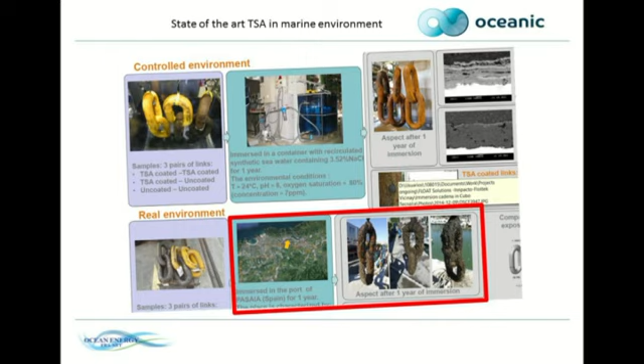So the idea of this project was to try to innovate in something that is quite old and has been used for many years. This comes actually from a previous project by others, from Spain. The company tried to protect metallic parts in the environment by using thermal spray aluminum. As you can see here, when you immerse thermal spray aluminum or metal in the ocean, there is something called biofouling.

Especially the problem here is the barnacles. When barnacles attack the aluminum foam of the thermal spray aluminum, which is a protection against corrosion, the aluminum will corrode very fast, so you will lose your 20 years of protection that you were aiming for.

So we thought there was maybe a possibility to mix anti-fouling properties inside this thermal spray aluminum. That's what Oceanic is about. It's not an anti-fouling solution for boats or stuff like that, it's more to regain the lifetime of the thermal spray aluminum layer by adding a protection against especially barnacles.

The project has a partner from Portugal, WavEC, and then we have people from Spain and Basque Country also, and then 3 partners from Sweden. We have been testing in Portugal, in BIMEP in Basque Country, and also together with WavEC we have been testing in EMEC.

Now I will show a 3 minute video, made about 1 year ago, just to give a brief introduction of what Oceanic is, and then I will go to the final results. I don't know if there is audio or not.

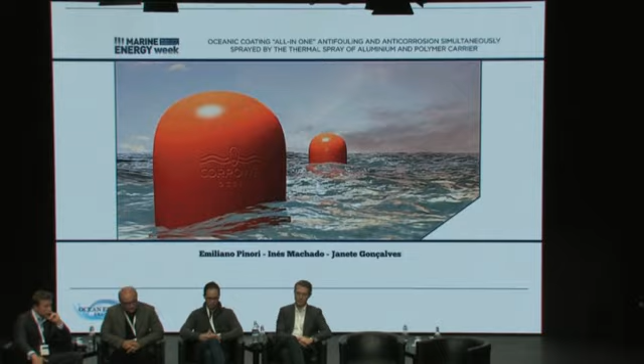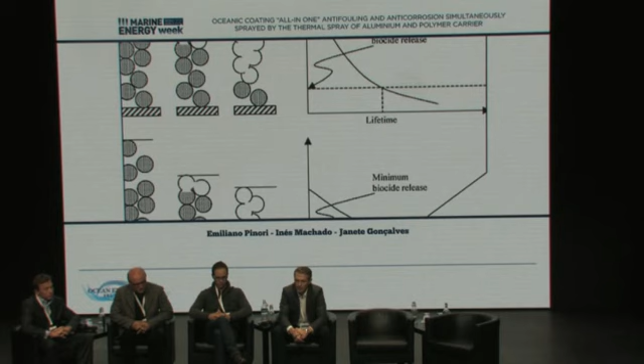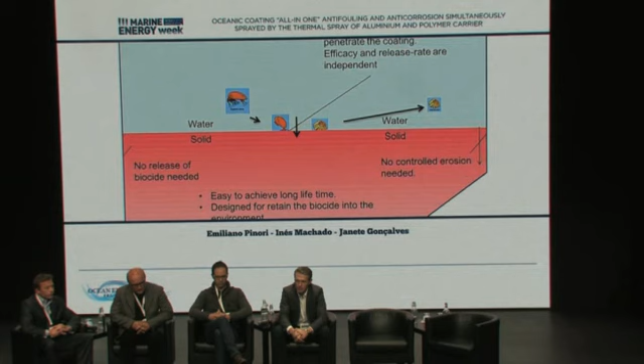Ocean energy devices and components are subject to one of the most aggressive environments. Corrosion, mechanical stress, but also biofouling and biocorrosion challenge the reliability of materials used. The ocean energy sector needs a surface protection system dealing with a very hard challenge. A novel technique has been demonstrated in the EU project LEAF. The new approach in anti-fouling has shown efficiency and has the potential to last for more than 25 years against barnacles, with trace emissions of organic biocide. More importantly, this approach is contact active and thus open for novel applications, even not paint-based.

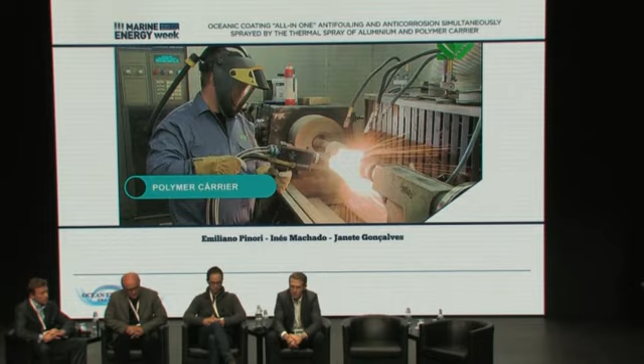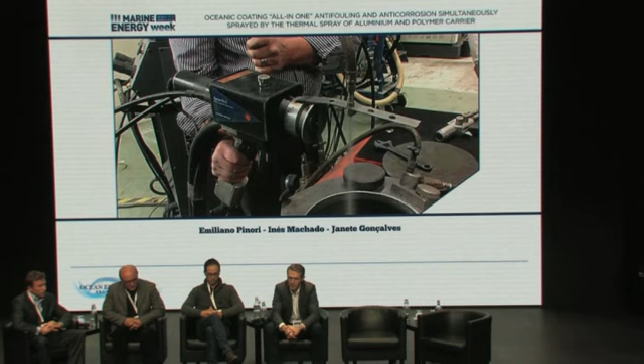The Oceanic project will embed this new anti-fouling technology into a polymer carrier, and mixing it with the well-established thermal spray aluminum technology will create a sprayed composite coating, achieving long-lasting protection against corrosion and biofouling in the marine environment. The modification of the TSA gun, with the addition of a feed system to add air-suspended polymer powder at a certain distance and angle with respect to the arc plasma nozzle, has been prepared.

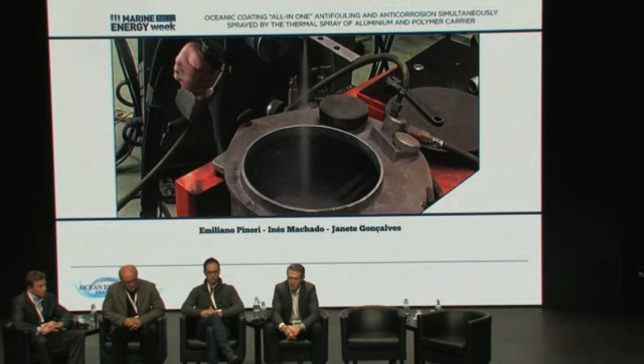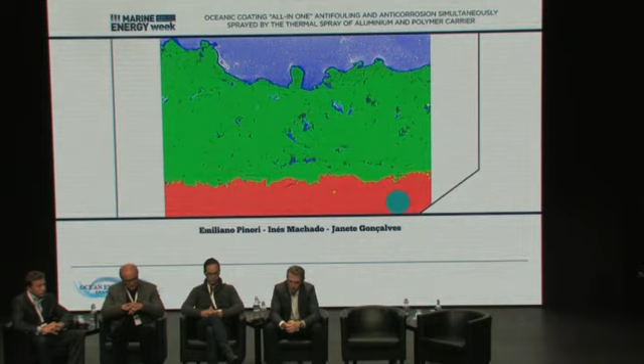The polymer used here is not yet the one doped with the biocide. This is under preparation, and several panels will be deployed at our 2 test bed sites, in Portugal and BIMEP in Spain, to check efficiency against corrosion and fouling during summer 2017. Oceanic gathers 8 partners from 3 different countries: Sweden, Spain and Portugal.

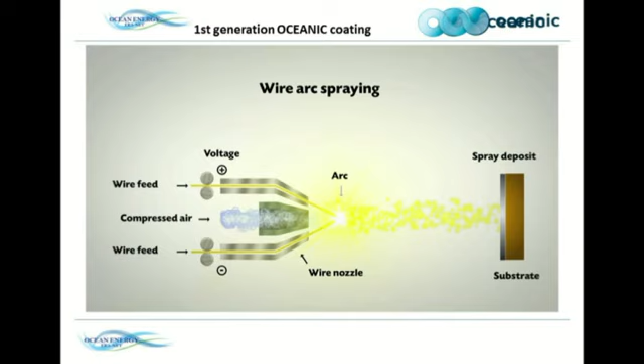So as you see, this video was 1 year ago. Now we have put the anti-fouling or anti-barnacle molecule inside the polymer and sprayed these panels. And as I said, beside Portugal and Spain, now we have also been testing in Scotland, in Orkney.

Just to remind you, the arc technique, the arc spray, is that you have a wire feed of aluminum or another alloy, with compressed air. The temperature is quite high there, but we have analyzed that the polymer and the substance are still alive once embedded in the aluminum foil.

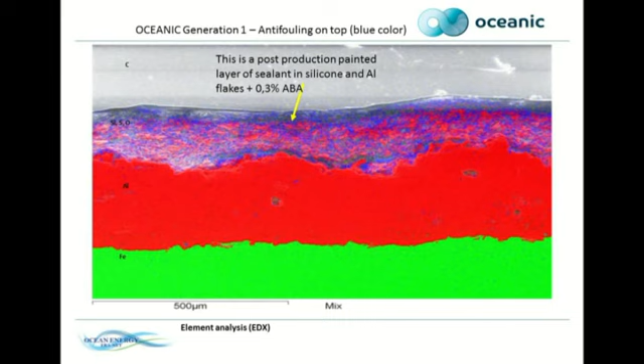At the beginning, we did it in a very easy way. As everyone knows, when you have the TSA layer, usually you put a sealant, a silicone base, and we put the abamectin there. This was the first generation.

We had very good results, but of course this means that when your layer is finished and deployed, you will never have this 20 years of protection against the barnacle. You maybe just postpone it by 1 year or 2. So we went for a modification of the gun, and tested and analyzed the results.

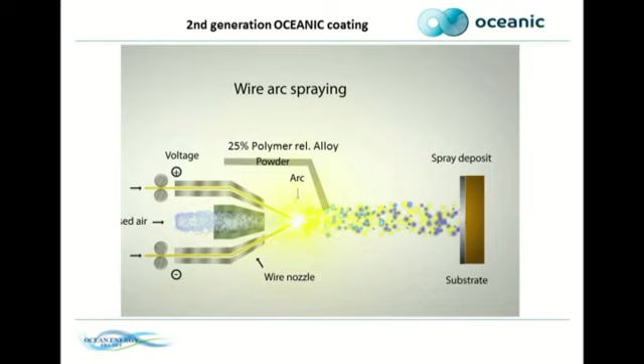So this is what we call our second generation. And as you've seen in the video, this picture, we could see that actually the polymer with this molecule called abamectin is inside there.

We tested here in Portugal, then we moved from offshore to near shore, in BIMEP and here in EMEC, together with Corpower.

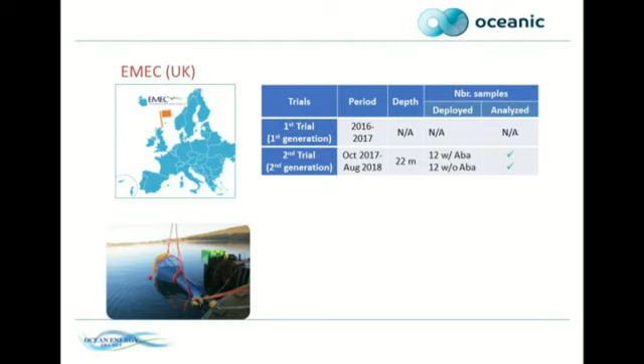So here you can see some results finally. These results arrived just 1 month ago, and we are still analyzing the results from Portugal and from Spain, and some of the panels are still underwater.

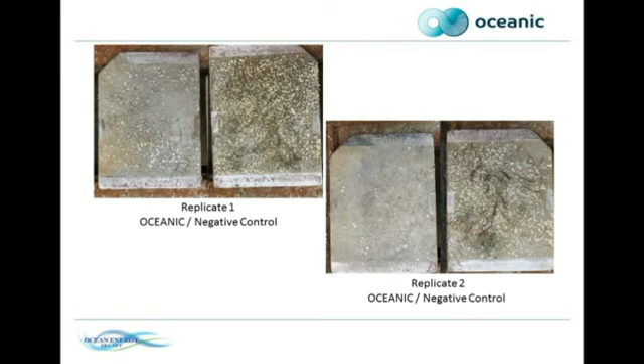As you can see here, on the left side you have the panel with the powder, with the polymer carrier with the abamectin. On the right side, you have the same setup, but inside the powder we don't have any abamectin. So it's the same material, the same structure, just the abamectin or this anti-barnacle molecule missing on the right side.

So you can see this is from EMEC, and you can see that there is a difference in how much the barnacle can grow on that.

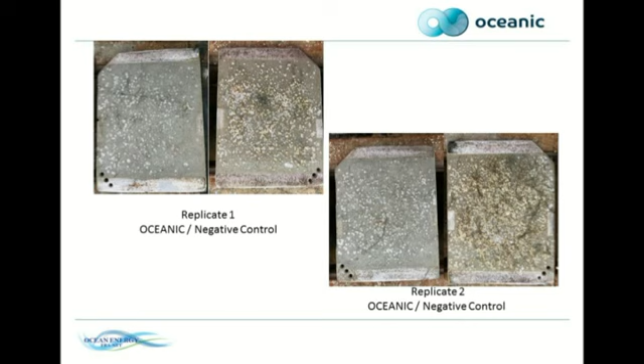There are several replicates - I'm not going into detail now, but we have different alloys and different kinds of polymer. It seems that all of them are giving significant results, at least preliminary. As I said, we will come out with final results at the end of the year.

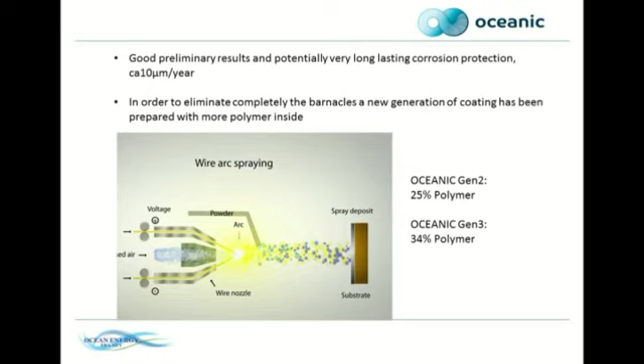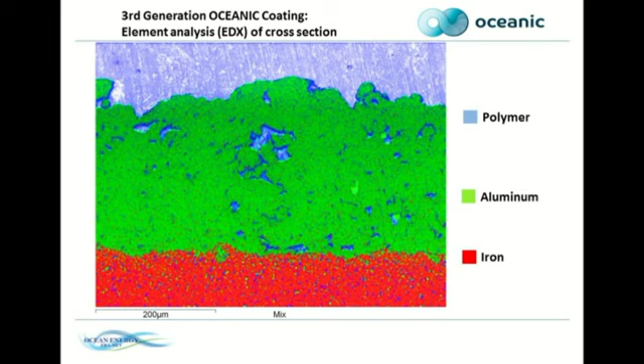Then what we needed was to try to improve this, because okay, it's better than the control, but it's still growing some barnacle. So what we did was move from generation 2, which has approximately 25% polymer when you spray it, and we modified it again, enhancing the amount of polymer from 25 to 34-35%. This is the analysis of this third generation of the polymer.

You can see there is a little bit more porosity, a little bit more polymer. We applied this, not this time on panels, but on what we call devices - it's shackle and eyebolt.

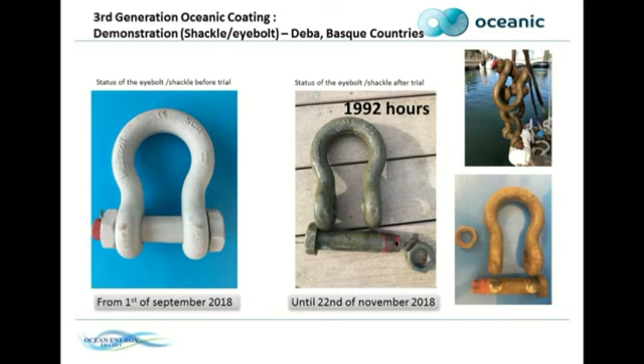And this was put inside the harbor in, I think it was Deba, so in Basque Country. This is not 1 year, but still usually here it grows a lot, even from September, so there are a lot of barnacles everywhere in this period.

And you can see that here, as much as we can see, there are no barnacles. There is some slime and other stuff, but we are most interested in barnacles because of their influence on the aluminum layer.

So we can see that we have tested and produced different alloys. We have tested them and worked on different polymers. So now we know a little bit more which polymers are working, which alloys work best. We have managed to do this all-in-one anti-corrosion, anti-barnacle solution.

Pedro will present another part of the project, which was to produce a database, not based only on our results, but on all the results, even from 30, 35 others. Pedro will tell you more, but it's a database that will be open to everyone to consult what's growing where.

And then, as I said, the final report will be on our website, so I hope we will be able to put that up sometime in December, before Christmas, if the weather and the waves permit us to do that. So thank you very much. If you have any questions.

I welcome Pedro Vinagre, Senior Researcher and Project Manager at WavEC, to explain the Oceanic project and the biofouling database.

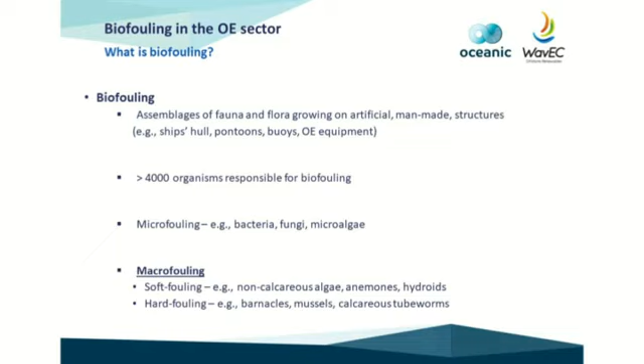There are over 4,000 organisms responsible for biofouling. It is divided into microfouling, including microorganisms such as bacteria, fungi, and microalgae, and macrofouling, which itself divides into soft fouling and hard fouling, which are the hard-shelled organisms.

Some examples of biofouling include different kinds of crustaceans, annelids, gastropods, and bivalves.

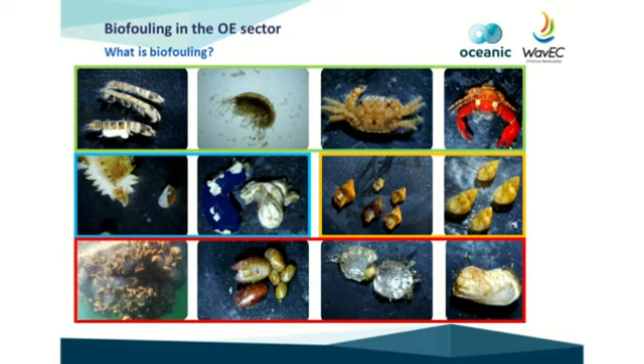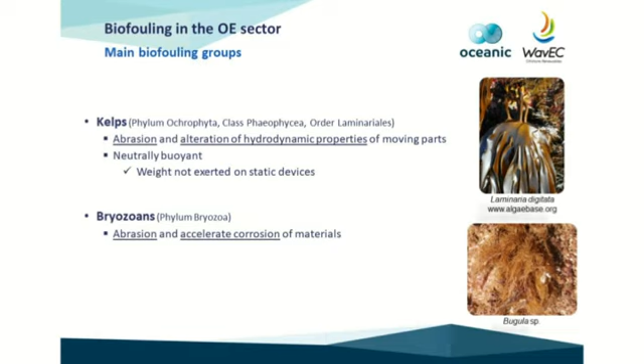In this database, we focus on 5 main biofouling groups because these are the most problematic within the ocean energy sector, namely the macroalgae, the kelps from order Laminariales. They cause great abrasion and alteration of hydrodynamic properties of devices, but since they are mostly neutrally buoyant, they mainly impact moving devices.

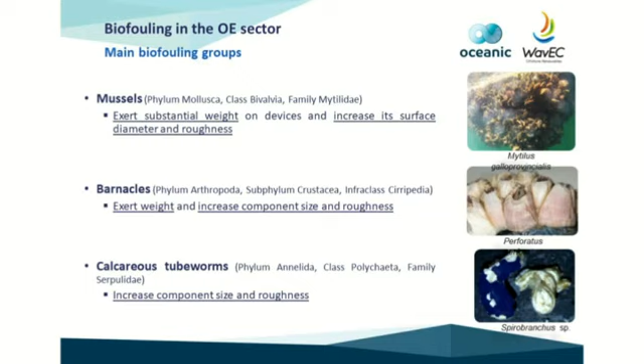Following that, the bryozoans, which also cause abrasion and accelerate the corrosion of materials. And some hard-shelled organisms such as mussels, barnacles, and calcareous tubeworms, which mainly exert substantial weight and increase the diameter of equipment and the roughness of that equipment.

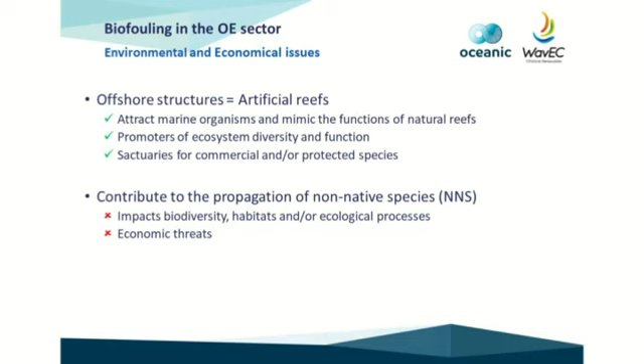The problem with biofouling is that offshore structures at sea mimic artificial reefs. This has positive aspects, meaning they will attract marine organisms and eventually promote ecosystem diversity and function, and may even be used as a sanctuary for endangered or commercial species.

However, because of this, they also contribute to the propagation of non-native species, which will eventually impact biodiversity and may also pose economic threats, for example, in aquaculture.

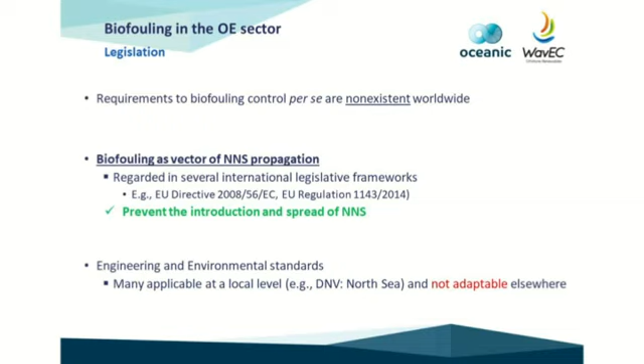There are no requirements per se directly related to biofouling. However, it is regarded in several pieces of legislation as a vector of non-native species propagation, and the aim of these legislations is to prevent the introduction and spread of non-native species.

There are also some engineering and environmental standards related to biofouling. However, they are many times applicable at local level and not adaptable to other regions.

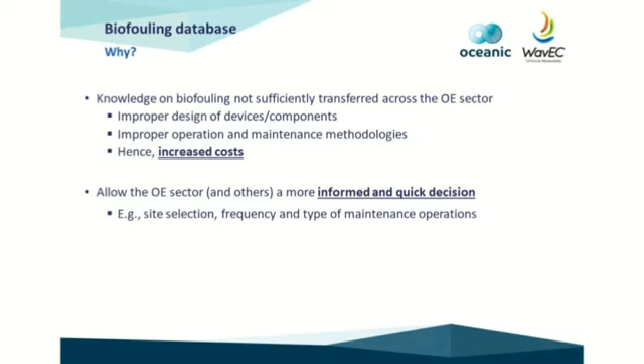So why develop such a database? We found that knowledge on biofouling is not being well or properly transferred across maritime sectors, and this many times leads to improper design of devices, operation and maintenance methodologies, and of course increased costs. Our database aims to allow the ocean energy sector and others to make more informed and quick decisions, for example, when selecting a site and the frequency and type of maintenance.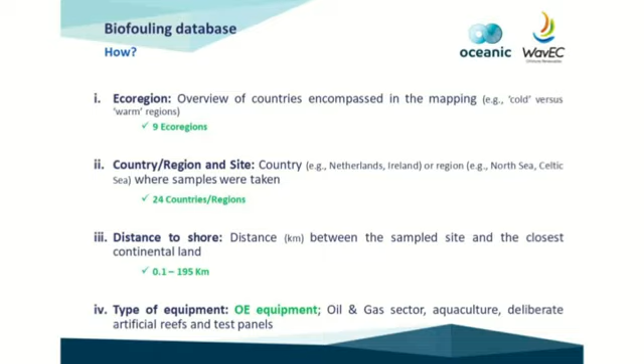How did we do it? We selected a few sections. This was developed for Europe at the moment. We searched for literature within biogeographic regions, so we have an overview of countries encompassed in the mapping.

At present, we included 9 ecoregions. Then within each ecoregion, we selected the countries. We have up to now 24 countries.

Following that, the distance to shore - this is the distance in kilometers between the sampled site and the closest continental land, which ranges from 0.1 to 195 kilometers.

The type of equipment - firstly we focused on ocean energy equipment, but due to the scarcity of data, we also searched for literature on the oil and gas sector, aquaculture, other artificial reefs, and also test panels.

We also included the period of immersion, which was the time in months or years during which the biofouling could grow - we found data ranging from 1 month to 39 years. And the depth at which data was retrieved, in this case from surface down to 90 meters depth.

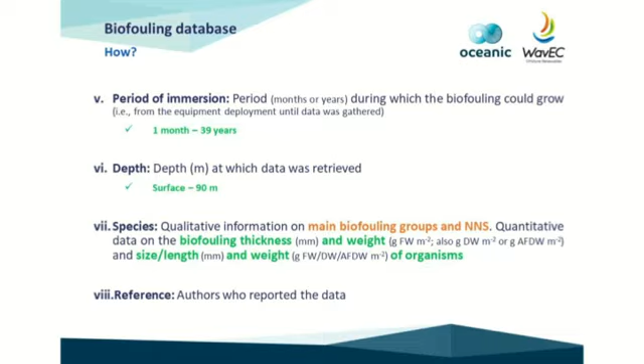Then we added the species qualitative and quantitative information, mainly the biofouling thickness and weight of samples, and the size, length and weight of the hard-fouling organisms. And finally, of course, we reference the authors that reported that data.

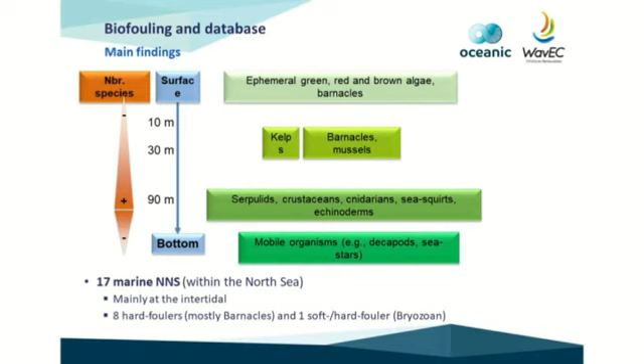The main findings were that the number of species would increase down to 90 meters depth and decrease largely towards the bottom. Depending on cold versus temperate, warmer waters, you would have a first band of green filamentous algae, followed by kelps and accompanied by barnacles and mussels up to 30 meters, and then very different kinds of mobile organisms down to the bottom.

Interestingly, we found in this data 17 marine non-native species already reported within the North Sea. They were found mainly at intertidal zones, and mainly they were barnacles.

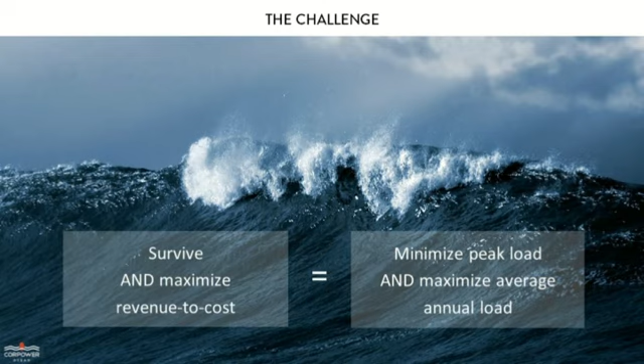If you look at the technical challenge behind that, the challenging part is that you often have very high peak loads, which drive the sizing, the dimensioning, and thereby the cost of the devices, whereas the average loading is on a lower level. If you have too large differences between peak loading and average loading, it's hard to make a business case.

That key challenge is what we are addressing and changing with the technology we're introducing by Corpower. To do that, we're introducing a few innovations to wave energy. Our buoy is a point absorber, a pre-tensioned composite buoy moored to the seabed. You see the cable coming out at the bottom.

If we look inside the composite buoy, we have a few innovations that make wave energy more effective. The first is a pre-tensioning technology. Instead of loading the buoy with a lot of mass, we pull it down to the midpoint by an air pre-tensioning system. The effect is that the natural frequency the device wants to oscillate with in its natural state is much faster than any incoming wave of an ocean spectrum.

This means it's a very poor absorber of energy - it doesn't respond to the ocean waves. This is the detuned, protected state that we use in our device during storms. When we put it back into the natural state, it's very transparent to incoming waves.

What we then add is a new invention called the wave spring, which is a negative spring that changes the stiffness of the system. Doing that makes us resonant with all incoming waves of a typical spectrum. So it's an on and off control.

On the buoy here, moving in the tank, you see how the buoy actually makes a motion which is 2 to 3 times higher than the incoming wave itself. This is due to phase control, and the resonance effect amplifies the motion 2 to 3 times, and 5 to 10 times higher velocity.

After this, we add a new solution we call a cascade gearbox, which we use to translate this amplified linear motion into rotation with a very robust and high efficiency type of gearbox that has a high degree of damping. These three innovations together bring new solutions to wave energy that make it possible to become much more competitive compared to the past.

This is the PTO as it looked in our stage 3 equipment. If you look at some of the metrics we've been able to show so far - energy per force or energy per volume, basically how much you can extract from a given buoy volume - we've been able to show 3 times as much energy compared to the prior state of the art.

And if you look at energy per ton in structural efficiency, which was mentioned in previous talks today as well, we've been able to increase it 5 times compared to the previous state of the art. With these solutions, we bring wave energy to a similar structural efficiency as the most competitive offshore wind turbines of today.

So it's a major jump for the sector. And to prove this, we've been going stepwise.

We followed a structured verification approach where we started small-scale tank testing here in Portugal in 2012 and 2013. We got very good results, which motivated investment into the next stage of testing that we did in France in 2015-2016, where we built our first PTO test rig, which we ran in Sweden between 2014 and 2016.

And now recently we've just completed our stage 3 demonstration that we've been running in Orkney. It's been a 3-year project overall for the design, fabrication, and dry and ocean testing, and I wanted to give you an update on the results we've shown there.

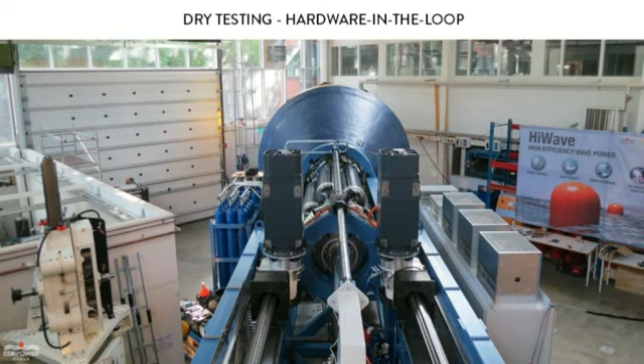We can say that the first phase of the project, we've been going through an extensive dry testing phase. This part was funded by Wave Energy Scotland and the program David mentioned before, together with the Swedish Energy Agency and InnoEnergy, and we started putting the devices together.

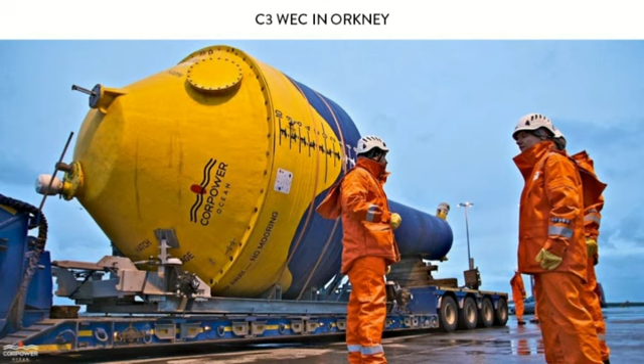With a simulated wave environment in a hardware-in-the-loop test rig, we could start with low energy waves, low motion, and begin debugging and stabilizing the equipment. We corrected around 100 different small issues with the equipment until we could have it fully stabilized and achieve the uptime and availability, and by the end of the dry testing period, we took it through full range storm loading that we could simulate in the dry test rig.

After that, by September of last year, we shipped the equipment to Orkney. This is what our half-scale device looks like when it arrived in Orkney. It's a 4.2 meter buoy, 15 tons.

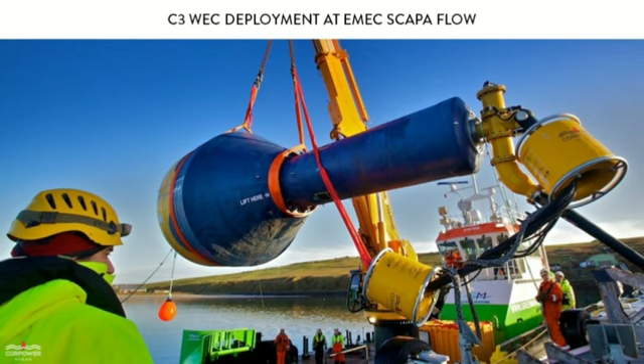We then installed it at the SCAPA Flow test site, which is a nursery site of EMEC. We had the opportunity in the ocean test program to go through 3 rounds of installation and retrieval while optimizing all the auxiliary components around it. So today we've gotten down to around a 1 hour cycle time for connecting the device after positioning the vessel and arriving at site.

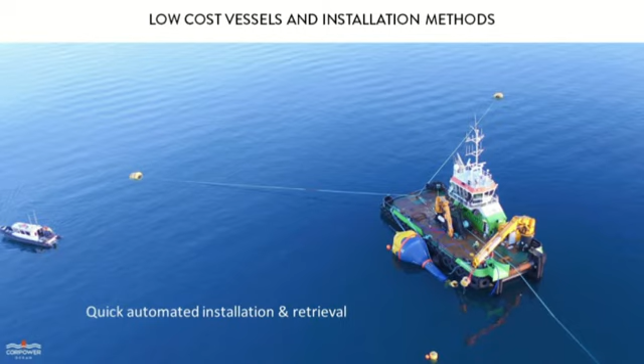So we've been developing very effective and low-cost operations and maintenance methods here using multicats with day rates in the few thousands of pounds per day.

And with the installation in Orkney, we've been connected to a microgrid, a floating microgrid located on this test and support buoy, and we've had data transfer and communication through radio link to shore.

When we did the testing in the dry rig in Sweden, we were grid connected, so in that sense we've proven the grid quality during dry testing. And here we've proven the market application for off-grid, islands and other offshore installations with the installation in Orkney.

Since the installation, we've been going through a range of fairly large storms. We have seen winds up to 50 knots, and we've had waves up to 4 meters, with individual waves on this half-scale device equivalent to 8-meter waves in the full-scale equipment.

Here you can see the device operating in this detuned storm protection mode, and you see how the device is essentially standing still while large waves just pass by it. The device becomes transparent to incoming wave energy, and you can compare this function to a wind turbine pitching down its blades in high storms.

Essentially, every commercial wind turbine on the market today has that capability of pitching down the blades to avoid overrunning in storms, and we're adding that same functionality to wave energy with our technology. That has been proven to work extremely well, and the loads we've measured in storms are actually not higher than the loads we're measuring in the moorings during regular operational sea states.

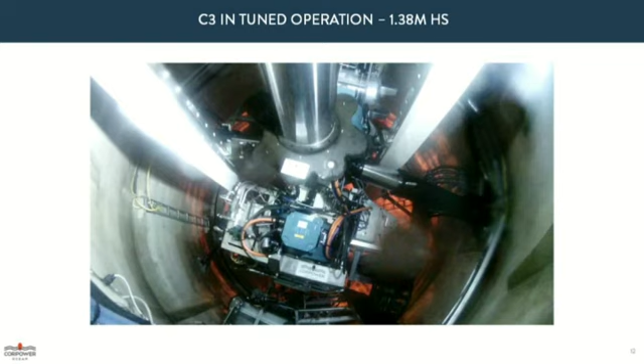If we look inside the device when we ran it tuned, you see a large motion, and we've been able to verify the energy production in all the relevant sea states you could experience at the SCAPA Flow test site. Very encouragingly, we've actually proven that this transparent protection mode has worked really well.

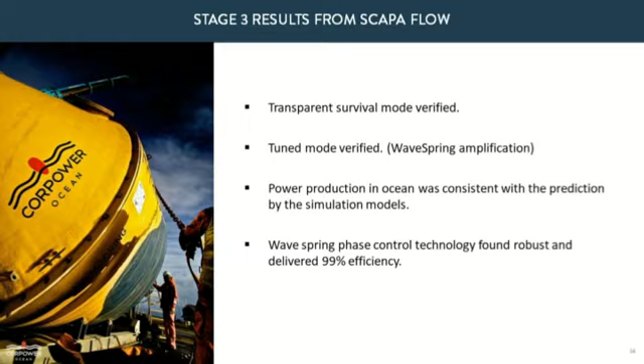We've shown survivability throughout all the weather experienced, and the power production in all sea states measured has been slightly higher than predicted by the simulation models. That has been one of the most encouraging outcomes of the testing - a combination of survivability and effective power production. This new wave spring technology has been proven to have very high efficiency.

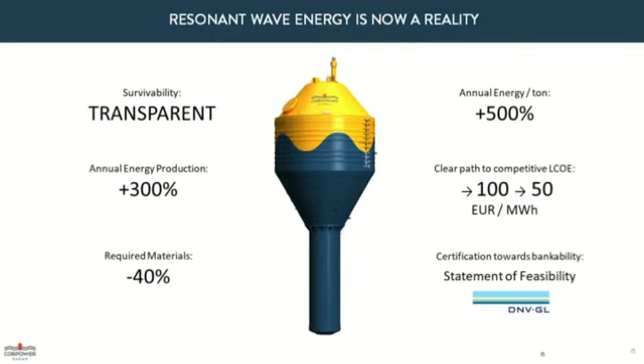So to summarize, we can now confidently say that resonant wave energy is a reality, and the transparent protection mode is probably the most important feature that we bring to make wave energy reliable.

We've proven an annual production increase of 300% for the same size buoy when using the wave spring control technology. Looking at structural efficiency, how much energy we get per ton, we are above 10 megawatt hours per ton on the very first full-scale prototypes.

If we compare that to some of the wind float numbers mentioned before, around 300 tons per megawatt, this corresponds to about 200 tons per megawatt in our very first generation full-scale equipment. So we think we're taking wave energy a major step forward here.

Getting a lot of energy from a fairly low-cost small device gives low capex per megawatt. Small lightweight equipment is also cheaper and easier to handle with low-cost vessels, which drives down operations and maintenance costs. Altogether that contributes to a clear path to 100, and to 50, euros per megawatt hour as volumes increase.

In stage 3, we've been going through a certification program together with DNVGL, where we've achieved a statement of feasibility. In the next phase, we're now looking to have a full prototype certification on the equipment.

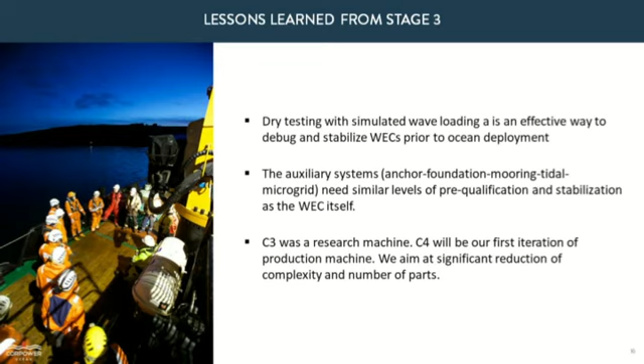We've also done a lot of learning through the testing over the last 18 months. One of the big conclusions is that dry testing is essential - there are so many small things you could and should find in controlled environments on land before you put anything in the ocean. So at full scale, we will continue to invest in dry test equipment that can provide full range loading up to storms.

We've also concluded that with all the wet systems around it, most of the downtime we had in Orkney was actually due to auxiliary systems such as the anchors, the tidal regulation, and the microgrid. So it's just as important to pre-qualify those auxiliary systems.

Having done the dry testing, we achieved very good availability of the wave energy converter itself. In our next programs, we will have a larger program pre-qualifying the wet kit, if you like.

C3 was our first equipment that we put in the ocean. It was a research machine to prove the performance and survivability in storm protection mode. Next time, we're aiming for a significant reduction in complexity, doing the same functions with fewer parts and driving down the cost with that.

Our vision for 2023 is to have a fully bankable product proven through ocean testing with at least 3 devices operating in an array. We are going to clock at least 8,000 hours of operational data on these so that we can get it certified for availability and yield.

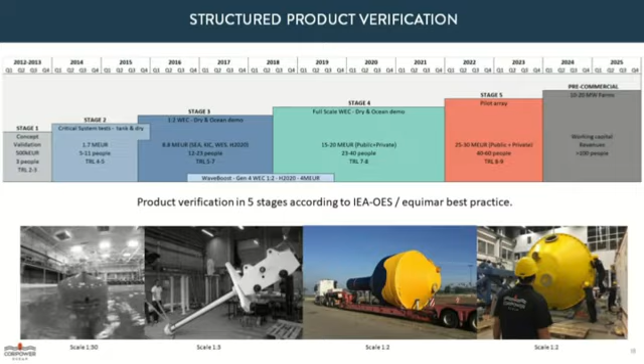We plan to do this in 2 more stages: what we call stage 4, a single full-scale device, which we are currently in the design phase of, with construction scheduled to start after next summer. Then another array phase adding 3 more devices to this installation.

A big part of the program is already funded. We're still in discussions with multiple places for where to go - Portugal is one option where we might end up with this demonstration.

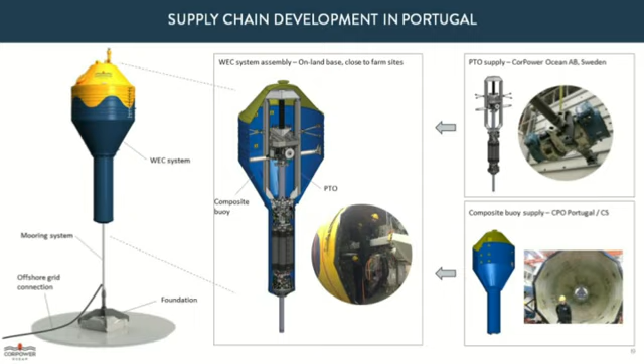If we end up here in Portugal, we intend to build out a significant supply chain - essentially everything around the system: the composite buoy, the foundations, the moorings, the electrical infrastructure, and of course the operations and maintenance installation work will be developed here in Portugal.

In Sweden, we will do the drivetrain, the PTO itself, which sits on the inside of the equipment. So we're looking at setting up an operations and maintenance base in the north of Portugal.

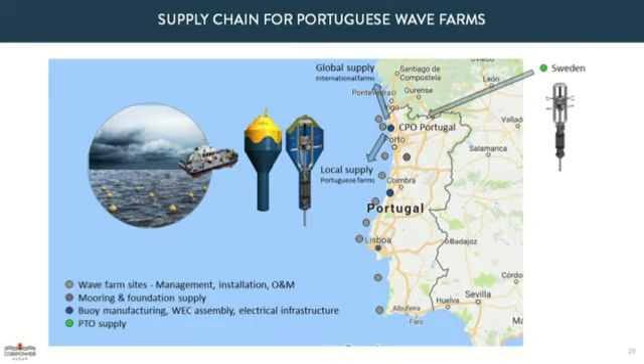If we go here, we will be using the Aguçadoura test site together with EDP. We found very attractive facilities where we could build out both for the final assembly between the composite buoys and the drivetrains, and for operations and maintenance. So we're very excited about the opportunities of taking wave energy to a fully proven commercial solution here.

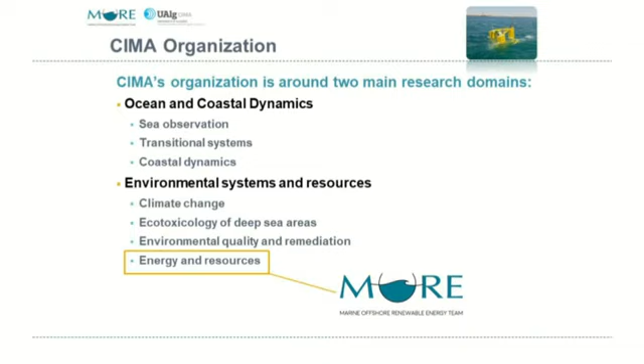Its organization is around two main research domains, which are ocean coastal dynamics and environmental systems and resources. Each of them has its sub-research topics. It's in the second one where the MORE team is inserted.

At the moment we are four researchers with different areas of expertise. Claudia Siqueira is a professor at the University of Algarve. She's a mechanical engineer specialized in vibrations, maintenance, and condition monitoring systems applied on wind turbines.

Theo Moura is a postdoctoral fellow under the project Monitor. He is an oceanographer, and his expertise is in long-period waves and data acquisition.

Myself, I'm a Marie Curie fellow under Project Optica. My background is in coastal engineering, and my expertise is in numerical modeling and mathematical optimization.

Finally, André Pacheco is the former vice director of CIMA, and he is the MORE team coordinator. He is an oceanographer, and his expertise is in coastal process and data acquisition.

Related to our projects, right now we are involved in five marine renewable energy projects, all of them related to UK institutions.

Project SCORE, Sustainability of Using Ria Formosa Currents on Renewable Energy Production, is funded by the Portuguese Foundation of Science and Technology. Its main objectives are to collect data from the operation of a small floating device, to validate models that will allow assessing the environmental impact of energy extraction, and also to develop cost-benefit analysis of tidal energy balancing supply and demand.

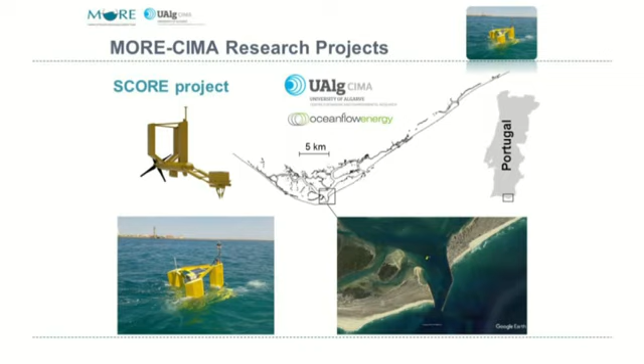For those who don't know, Ria Formosa is a coastal lagoon based in the region of Algarve in southern Portugal. It's a multi-inlet system where the Faro-Olhão inlet has pretty strong currents, and is where we deploy our small device.

Project Optica, Optimization of Tidal Energy Converter Arrays, is my Marie Curie project. The main objective is to formulate and solve mathematical optimization models based on numerical simulations to minimize the levelized cost of energy while decreasing detrimental environmental impacts.

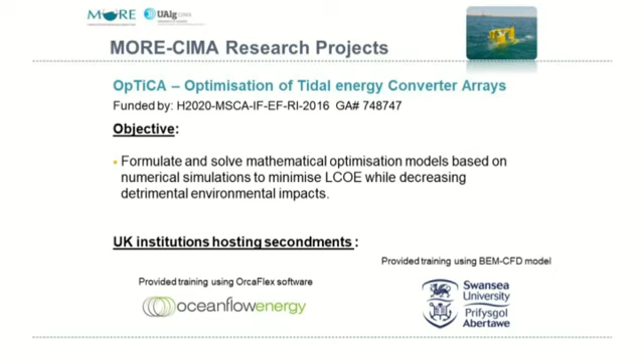The project considers two secondments, both in UK institutions. The first one was with Ocean Flow Energy, where I gained skills using the OrcaFlex software.

The second secondment was with the Marine Energy Research Group of Swansea University, where I got skills using a blade element momentum CFD model based in OpenFOAM. Here are a couple of results applying the BEM CFD model with some horizontal axis tidal turbines.

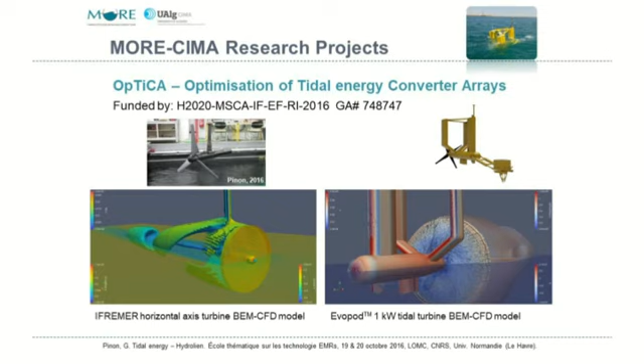Project Monitor, Multi-Model Investigation of Tidal Energy Converter Reliability, is funded by the Interreg Atlantic Area. Its main objective is to investigate the reliability of tidal energy converters and develop tools to increase it.

The project consortium is made of several institutions from Europe, including three from the UK: Swansea University, which is the project leader, EMEC, and Catapult Offshore Renewable Energy.

The other institutions are the University College of Cork, the region of Normandy, University of Le Havre, and also two tidal energy developers, one from France, which is Sabella, and the other from Spain, which is Magallanes Renovables.

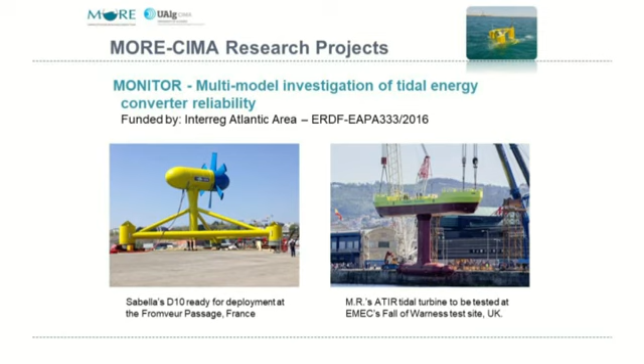On your left you can see the Sabella D10, which is a bottom-fixed tidal turbine, and on your right is the ATIR floating platform from Magallanes Renovables.

FLOWSPA, Floating Offshore Wind Support Platform Assembly, is funded by the H2020 SME Instrument. Its objective is to demonstrate the feasibility of a floating offshore wind foundation structure, the StarFloat. The project leader is Ocean Flow Energy.

We are helping Ocean Flow Energy with the proposal writing, numerical modeling, prototype construction, and the setup of preliminary stability tests. Here you can see some pictures of the small prototype that was tested at the Royal Quays Marina in Newcastle.

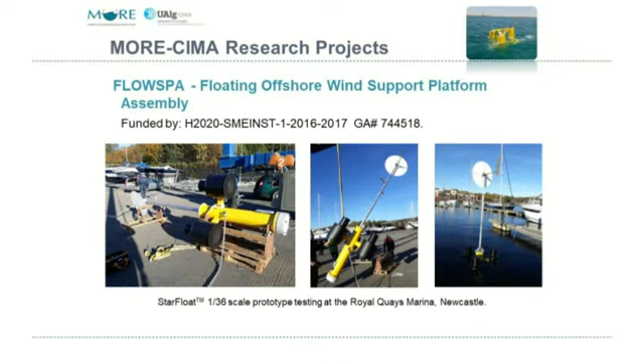Finally, PAMS, Performance Analysis of a Multifloat Spar for Supporting Wind Turbines, is a continuation of the FLOWSPA project. It's also led by Ocean Flow Energy. Its objective is to test the device in a wave tank with different wave conditions and wind conditions. We will help Ocean Flow with the data processing.

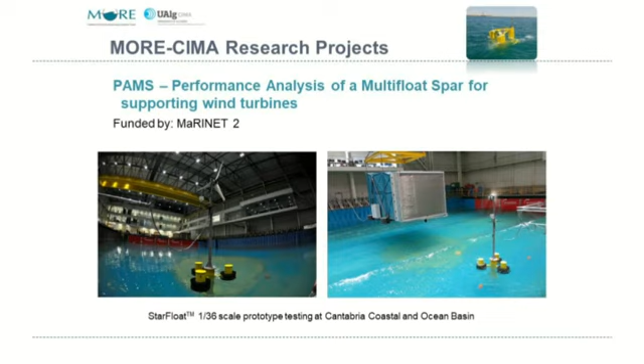Here you can see two pictures of the prototype being tested at the Cantabria Coastal and Ocean Basin tank.

So how can MORE team help you? We can give support during prototype testing with data collection of mechanical parameters like vibrations, and also oceanographic data with flow velocities, turbulence characterization, wave heights. We also can provide numerical modeling for resource characterization using nearshore circulation models or CFD modeling.

We can also provide a testing area at the Faro-Olhão Inlet, which is a good place, an ideal place for small prototypes of tidal energy devices and floating wind turbines.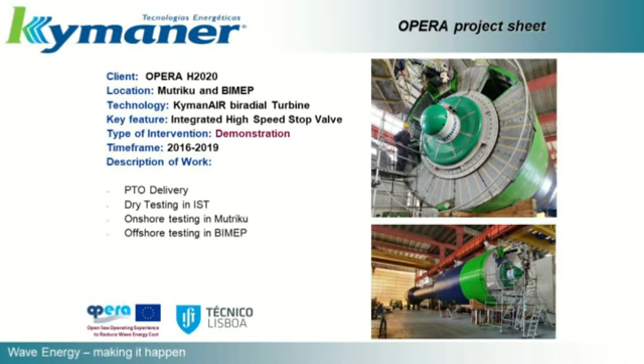What I will be talking about is the result of a process of development of a new turbine concept. It was developed jointly between the Technical University of Lisbon, the Wave Energy Group, and Kymaner. Kymaner is a Portuguese company exclusively devoted to the development of wave energy technologies, and in particular air turbines.

The example is the Opera Horizon 2020 project. What Kymaner delivered for this project was a biradial turbine, which is a patented concept that has a key feature of an integrated valve, a high-speed stop valve.

This is a key feature because it allows not only protecting the turbine from rough weather and rough seas, but also controlling the flow that goes through the turbine. Typically, when there is a storm, the usual wave energy converters shut down to protect themselves. What this valve allows is what we've been calling peak shaving of this overpower, enabling the device to produce even in very, very energetic seas.

The type of intervention on the Opera Horizon 2020 project was a demonstration, with a series of steps essentially being the design and delivery of the PTO—not only the turbine, but turbine, generator, and control. What we see in those pictures is the turbine.

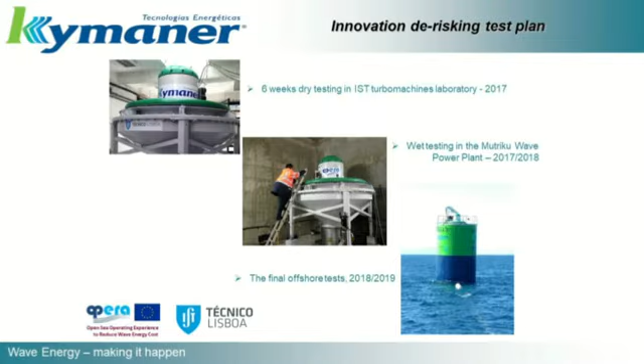The approach to de-risk this particular innovation has been very fruitful. What was chosen as a path to de-risk the turbine was a very intensive period of dry testing of the already manufactured, ready-to-deploy turbine in the IST laboratory, followed by a test onshore at the Mutriku wave power plant, which ran across 2017 and 2018. These are the test results I'll tell you about, and the final offshore test starts now, running through to July 2019. What you see there is the device already deployed, moored with the turbine on top.

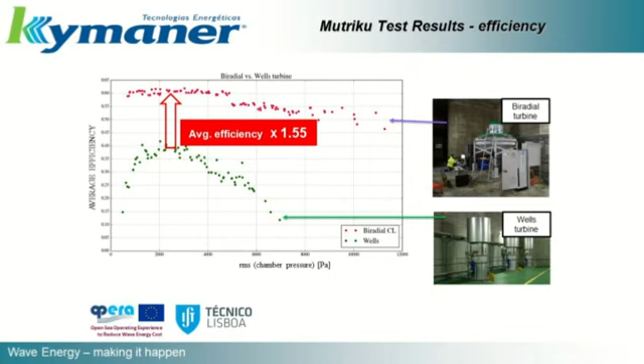Some interesting results related to the expectation of producing 50% more power than the reference. The Mutriku Wave Power Plant has 16 Wells turbines, and not all of them operate — there are some chambers on the extreme sides not currently in use. There is one position right in the middle used to test new devices from manufacturers wanting to test in a real environment. This was the opportunity provided by EVE, the Basque electricity utility, to allow this project to compare performance with the existing Wells turbines.

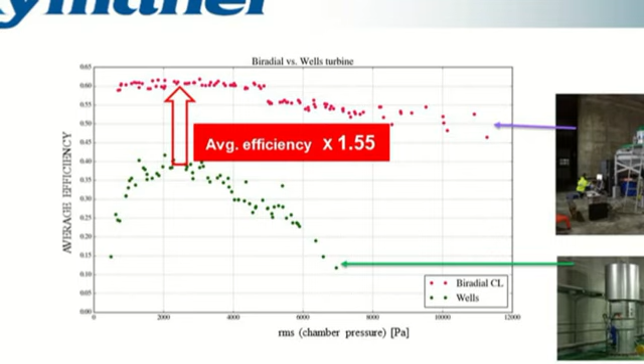What we see here is experimental data from the tests during 2017 and 2018, comparing chamber pressure on the axis against average efficiency. This is a typical Wells turbine response, and this is the biradial turbine response. One striking thing is that where the Wells performs better, the biradial efficiency is 50 to 55% higher, and in the rest of the range it's way beyond that. The operating range is also significantly higher. We didn't reach pressures beyond the point shown, as higher pressures didn't materialize at Mutriku, but it's not difficult to assume the curves would behave identically.

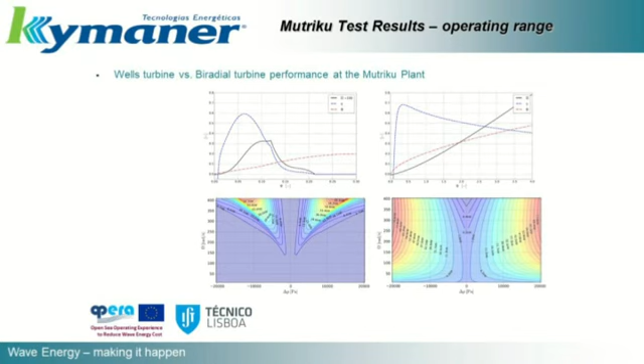These charts are a bit more technical, but look at the lower end on the left-hand side: the performance of the Wells turbine between negative and positive pressures versus rotational speed, shown on the vertical axis. The operating range and power generated by that device are shown in the painted areas. On the right-hand side, across the whole range, the biradial turbine produces more, and the net effect is that the annual energy extractable from that turbine type is way above what we can expect from the Wells. So in terms of the certification and the expectation of this project — to have energy production 50% higher than the reference device — it was achieved with success.

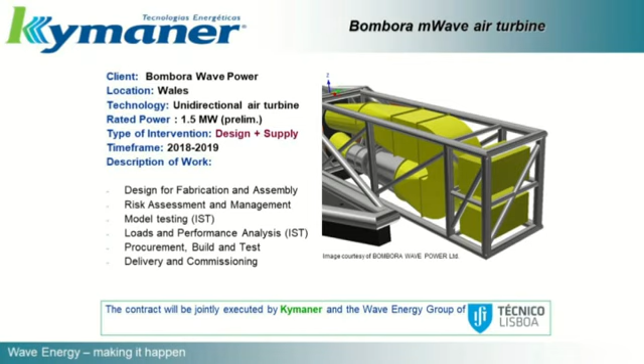Now, moving on to something completely different. All of our work is about innovation management and creating new products to be tested. We're happy to announce that last week, a company based in the UK awarded Kymaner the development and supply of a new turbine, completely different — a 1.5 megawatt turbine. This is probably the largest air turbine that will ever be built, to date at least. We're proud to announce this here; this is the first time we've spoken about it publicly.

We will manufacture the turbine and all the ducting that comes with it. The turbine is the centerpiece shown in gray, and the ducting involves designing and optimizing shapes to install in a device developed by Bombora Wave Power — you can look it up on the Bombora Wave Power website. It's a device with air pumps and air cushions that push air through the ducts, making the flow unidirectional. Unlike the Wells or biradial turbines, where airflow is reversible in a typical oscillating water column wave energy converter, this is unidirectional, so it more resembles a gas turbine in how it functions.